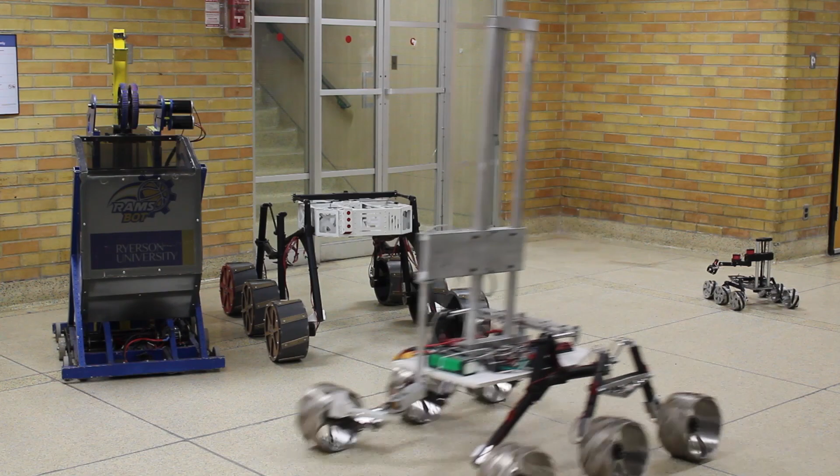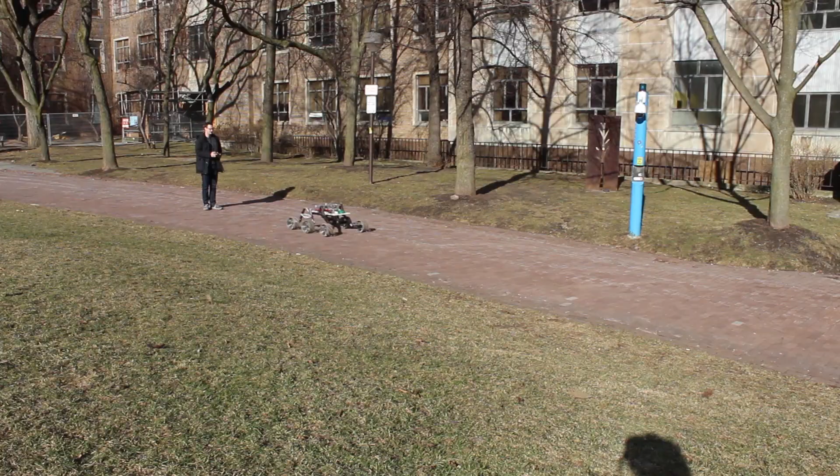R3 competes in robotics competitions all over the world, and we're very excited to come back to URC for our second year. After experiencing the terrain and traction conditions in Utah, we went back to the drawing board, focusing on higher speed, lower weight, and increased controllability for all our subsystems.

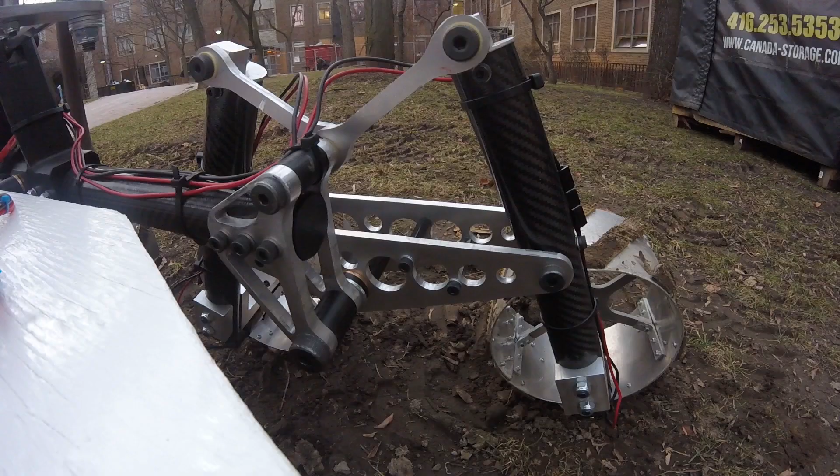Our chassis and drivetrain team has worked hard this year to reduce the weight of the rover, take advantage of new manufacturing methods, and improve terrain traversal. Last year's rover proved to be critically close to the weight limit, so this year a smaller rover was designed to drastically reduce the weight of suspension components.

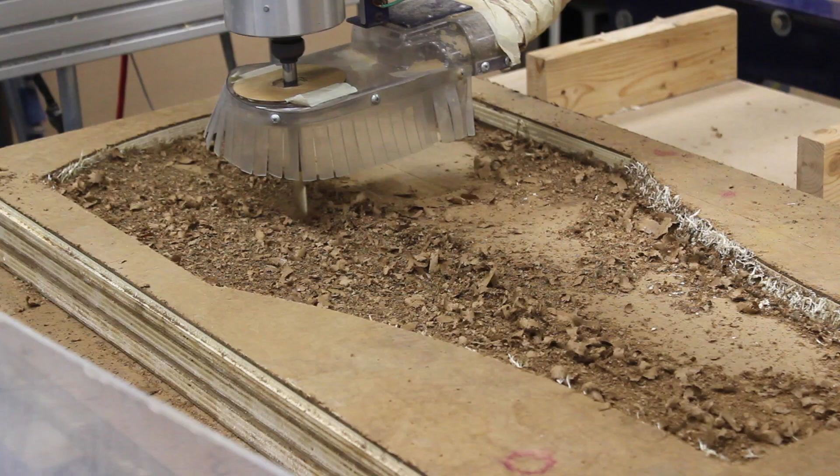To further reduce weight, the core loads of the rover, such as the robotic arm and the batteries, have been moved much closer to the center of the chassis, and a carbon fiber outer shell is being manufactured to house the electronics in an ultra-lightweight way.

To improve our terrain traversal, the suspension geometry has been modified to make obstacle clearance easier, and several prototypes of wheel treads have been tried to greatly increase the amount of traction the rover has. For the suspension, carbon fiber tubes have largely replaced welded aluminum, and carbon fiber embedded 3D printing has been used to produce the joints between them.

The arm team this year is taking a new approach to design, focusing on simplicity for the least possible weight. We have built a SCARA-style arm instead of the traditional 5 or 6 degree of freedom robotic arm. The SCARA design offers more rigidity and less backlash.

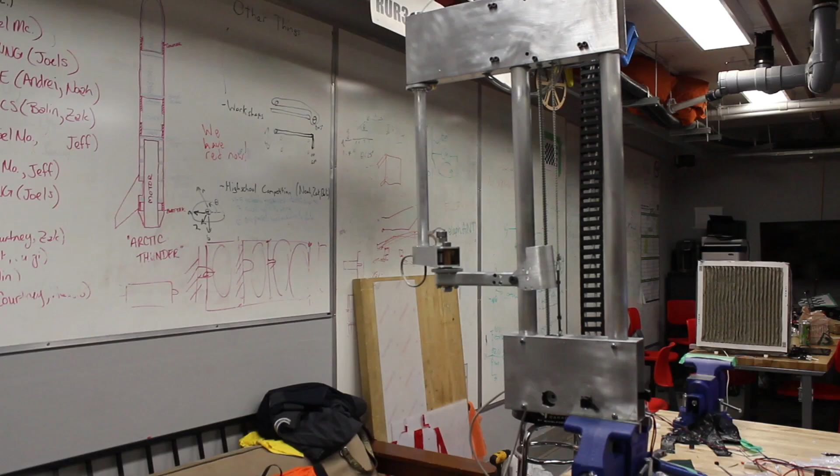It also features a Z-axis of vertical movement that helps our auger for the science task for fast and precise drilling with over 35 pounds of force. Two smaller arm segments move to cover a horizontal flat plane just large enough to type on a keyboard.

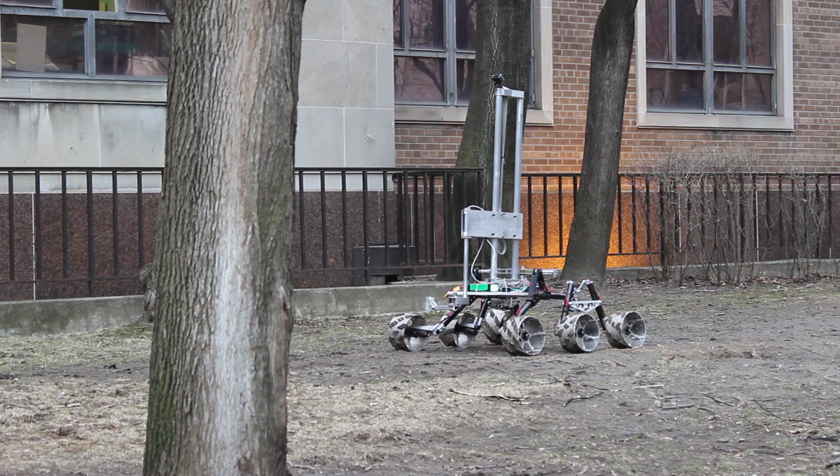With the use of a camera mounted inside of our 4-finger gripper, this makes it simple for drivers to navigate and interact with unfamiliar objects. This setup simplifies programming, and by applying Cartesian-based inverse kinematics, we have 100% automated the on-rover science task, as well as other simple picking and generic movements.

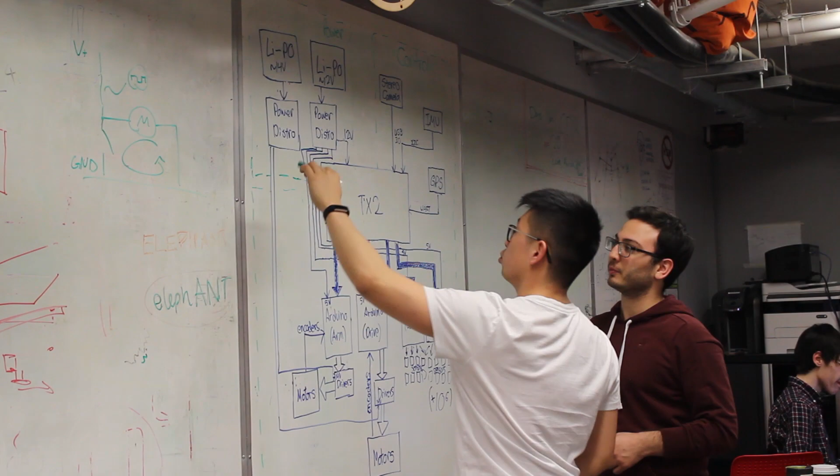This year, the controls team designed a highly extensible and reliable control system to focus on superior control experience for all teleoperated systems. We've implemented a new control architecture to better utilize ROS control, allowing us to have a modular control system at every level, including hardware and software.

ROS control allows us to accurately simulate all of the systems on the rover in real time, letting us quickly prototype and iterate all of our high-level control algorithms without the cost of damaging the rover.

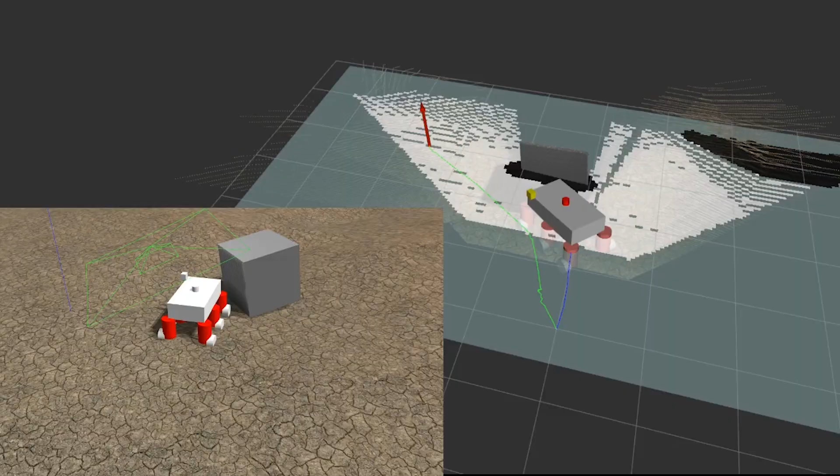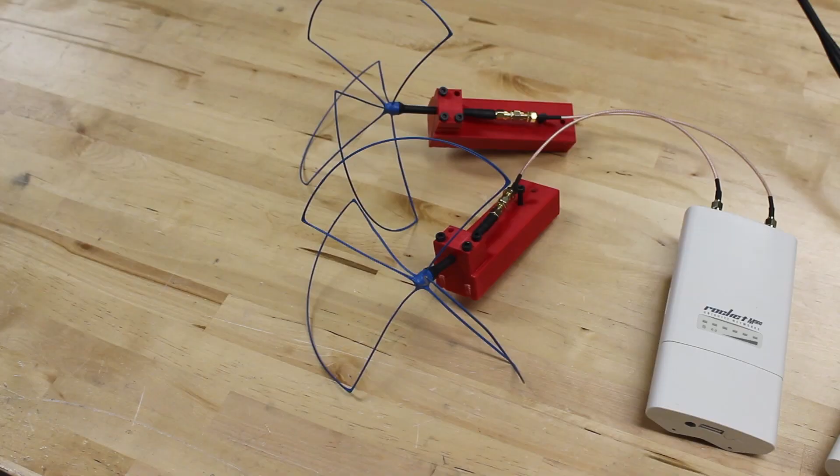Due to the nature of the URC competition, our new rover utilizes 900 MHz for its capabilities in non-line-of-sight situations. All critical communications, including teleoperated commands and primary camera feeds, are operating in this frequency. We pair this with 2.4 GHz for all auxiliary camera views and non-crucial data.

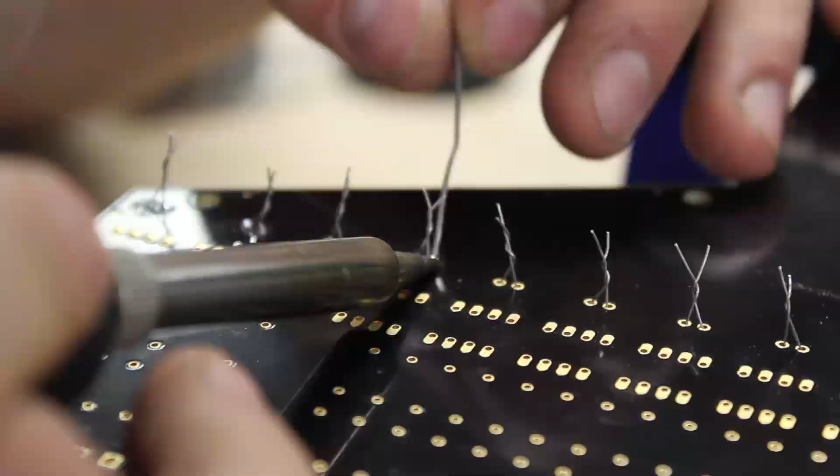For the autonomous task, we use a combination of real-time appearance-based SLAM and move_base for autonomous path planning. Our system primarily uses input from our custom stereo cameras to do its own path planning, but also allows for operators to do high-level planning and general path indication. In addition, we have designed redundant autonomous systems utilizing GPS and IMU data should the primary system fail.

For the science task, we developed an arm attachment and automated console capable of housing 15 sensors that simultaneously collect and send data back to the base station. This is a huge improvement from last year when we only had 3 sensors.

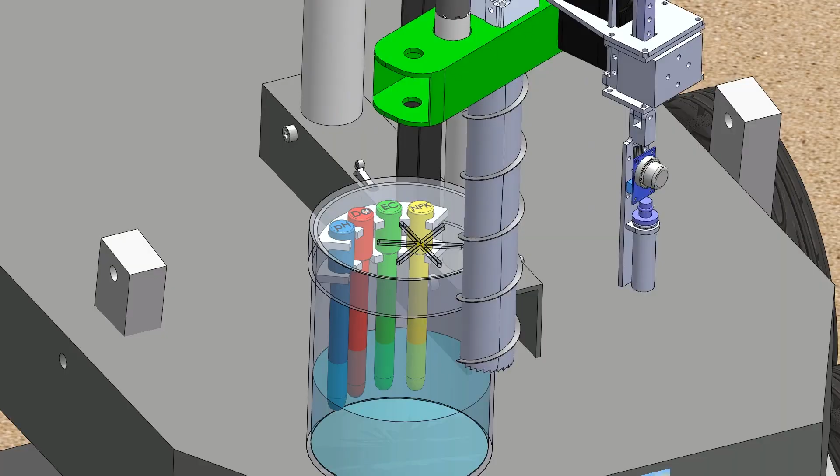This year, we're monitoring soil for hydrogen, carbon, nitrogen, oxygen, phosphorus, sulfur, and radiation levels. Additionally, we're measuring electrical conductivity, redox potential, dust particle density, pH, temperature, humidity, wind velocity, pressure, and altitude.

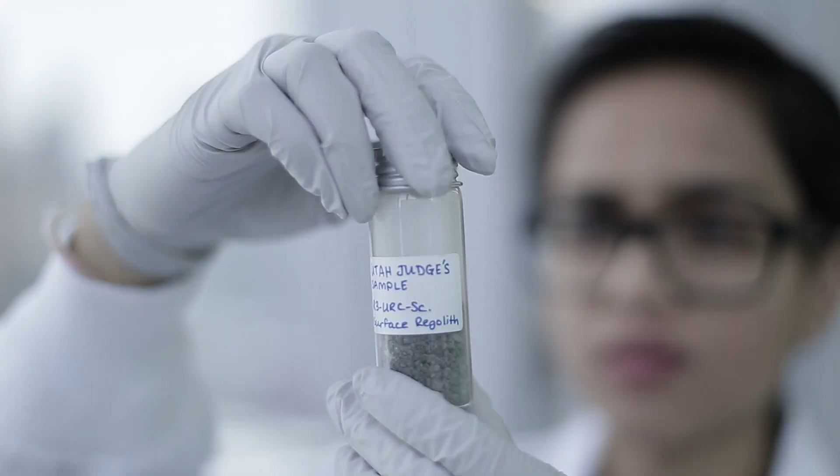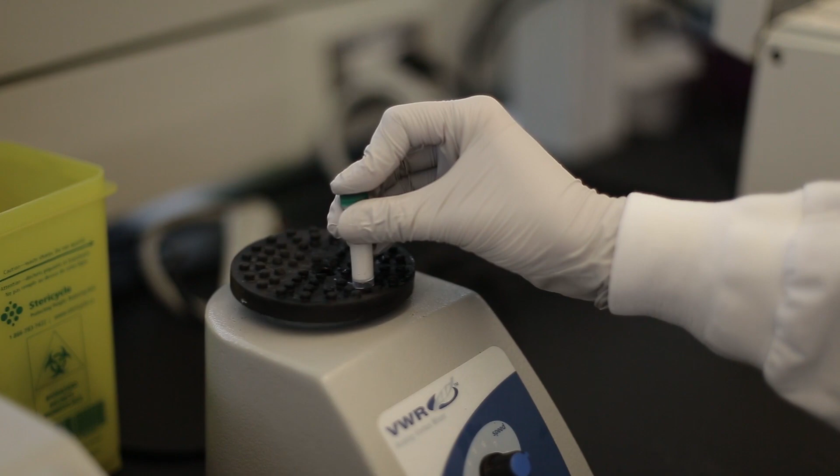Our biological tests are all simultaneously performed at the command station. We have expanded our assay to include DNA, RNA, and protein extractions. Our novel shotgun-like molecular biology protocols use affinity differentials to sequentially hone into our macromolecules of interest. This way, we can use spectrophotometry to quantify each step and calculate the UV 260/280 ratios.

Our tests fit within the safe 10-minute mark, leaving enough time for replications. For the geology task, we've developed image analysis algorithms using OpenCV capable of differentiating soil layers and soil samples under a microscope. We're confident that using our physical, chemical, and biological tests will allow us to give a strong assessment of extraterrestrial life on Mars.

We are extremely confident that we will perform well at URC 18. Our focus on reliability and weight has yielded a robot that is over 12 kilos underweight with our heavier testing frame. In the coming weeks, the team will be finishing our carbon fiber shell and our gripper, after which we will begin a rigorous testing plan.